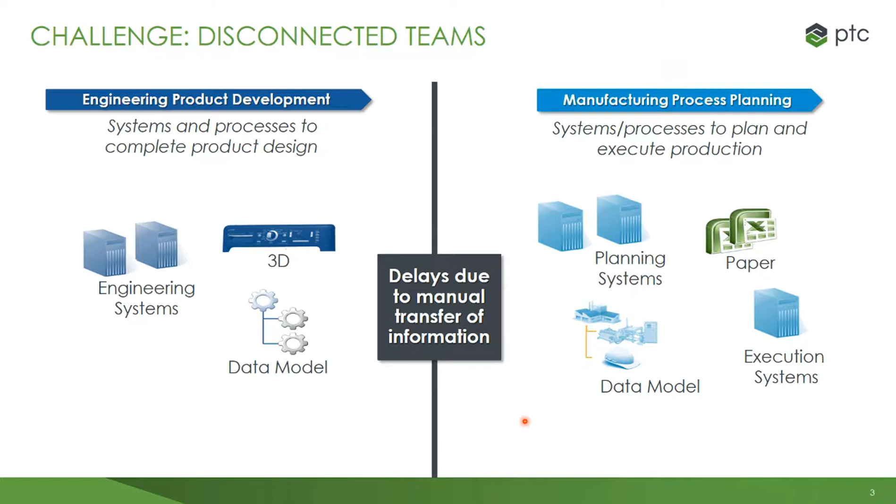Inconsistent data management results when each area of the business focuses on managing only a portion of the entire product definition. It is common for product design to be totally focused on the development of the product. To do this, they concentrate on the design intent and define the product details based on how they do their work. Product development often organizes their data by the type of design data and groups of design features.

It is also common for manufacturing planning to be focused on defining how the product will be produced. They concentrate on the manufacturing strategy and define the manufacturing plan based on utilizing production methods aligned to a facility's capabilities and the factory floor layout. In some cases, manufacturing engineering needs to consider variables resulting from multiple factory locations and strategies.

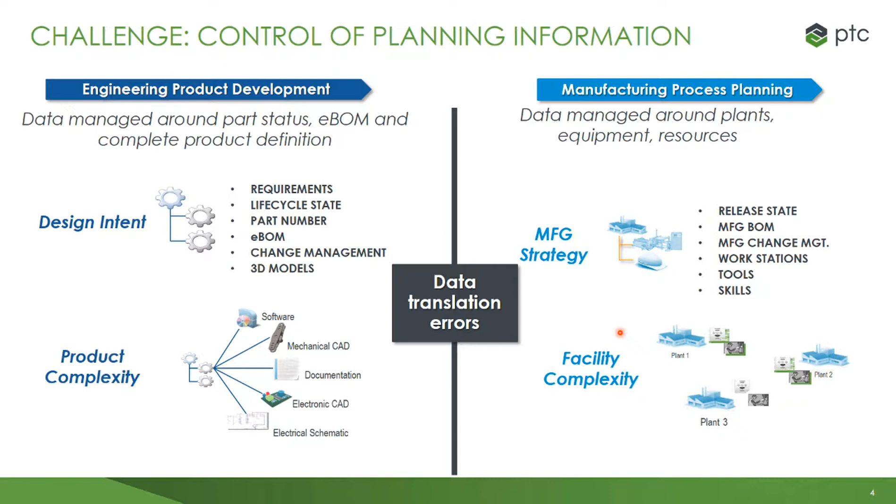Each group's focus on their own deliverables and data, combined with a patchwork of data transfer methods, often results in data translation errors and leads to delays in dealing with design updates and changes prior to the product's start of production. During development, the engineering product development teams will typically perform product design reviews to improve and enhance the product. Manufacturing engineering uses design for manufacturability reviews to identify potential manufacturability issues before production begins.

If manufacturing engineering is not involved early in the design process, they will not be aware of key manufacturability issues, and it may be too late to modify the design to eliminate those issues, or the last-minute change requests from manufacturing engineering needed to support the factory requirements can impact the product's start of production date. These separate processes are usually the result of different goals, objectives, and deliverables for each group. These differences limit the organization's effectiveness and lead to missed opportunities.

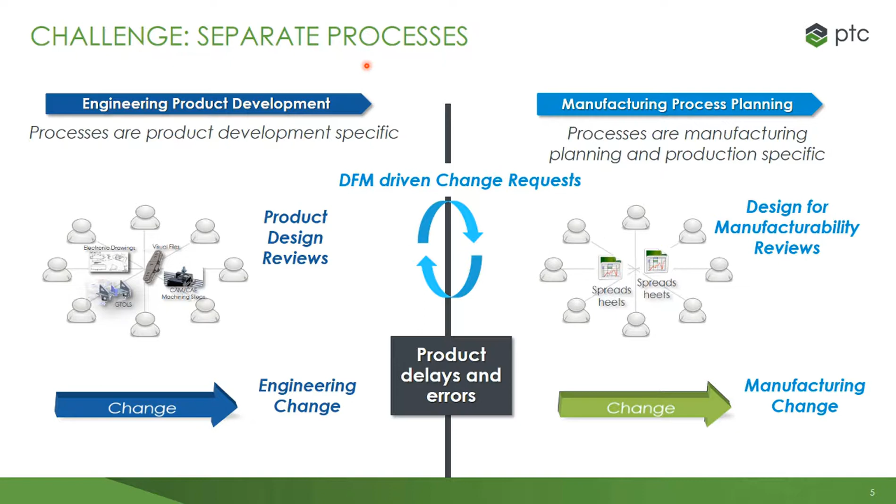When we look at the manufacturing engineering teams, we see that they have the responsibility to plan production for a single product that could be produced in multiple plants with varying resources, machines, and worker skills. When the companies do not have standard manufacturing processes that include detailed information about a specific factory's capabilities, the manufacturing engineer's job becomes very challenging.

Most companies do not have a way to manage a central library of plants, workstations, worker skills, and tools. If manufacturing engineers could leverage existing knowledge, they would be able to reduce the effort to develop manufacturing process plans for multiple plants. The missing management of factory capabilities and manufacturing processes limits the business's flexibility to decide where a product should be manufactured.

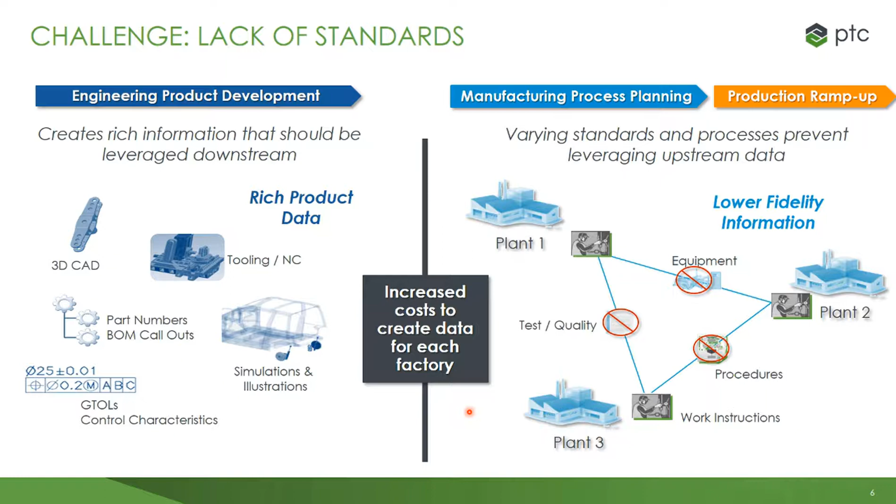The business costs resulting from these challenges are significant. Delays in the transfer of design information to the plants, data quality issues, late changes to the design, all have a direct impact on the product development costs, the quality at start of production, and missed launch dates.

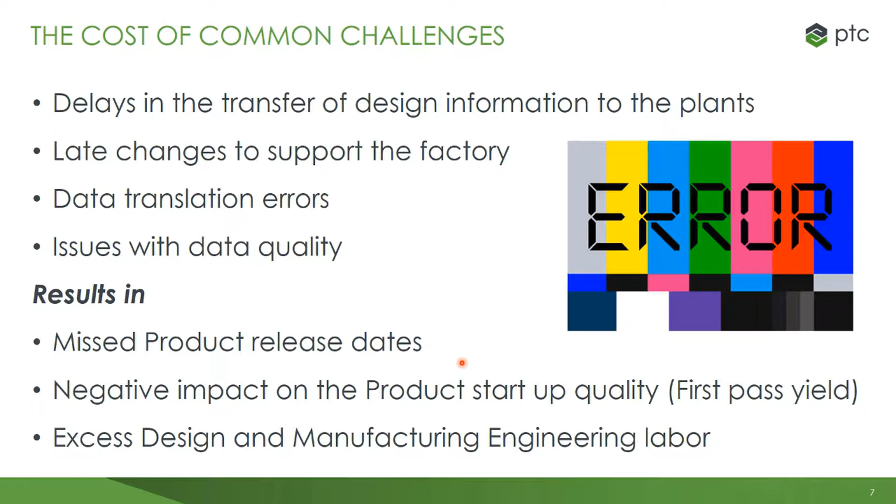For the remainder of this session, we will focus on a fundamental process that will enable your product delivery processes. This fundamental process is the transformation of a product's EBOM into an MBOM. The resulting MBOM is required to support all of the manufacturing planning activities and deliverables. Using the right tools and methods to create this critical set of information will give your business a competitive advantage.

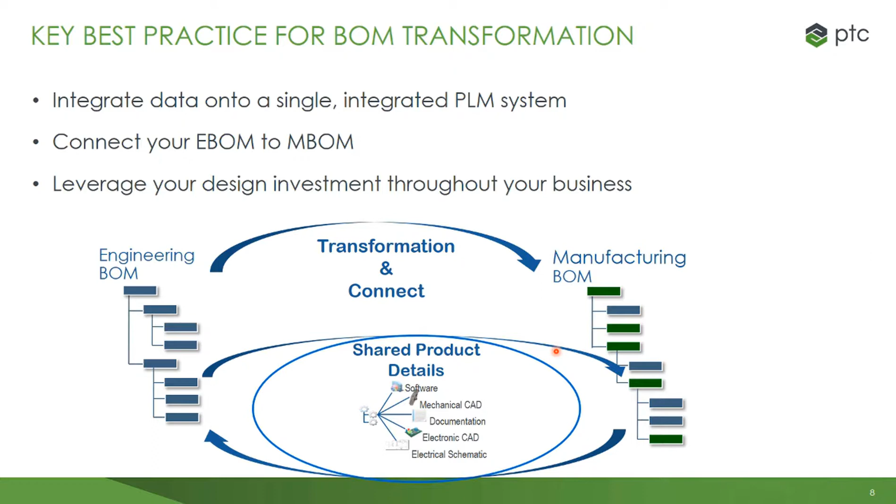In the upcoming demonstration, you will see how completing the EBOM to MBOM transformation process within an integrated PLM enables the entire product development team to leverage the 3D models, EBOMs, MBOMs, and product specifications throughout all aspects of the business. Two key aspects of the PTC toolset that will be highlighted in the upcoming demonstration are: 1. The ability to quickly create a restructured and enhanced bill of material from an upstream source, and 2. The capability to create links between the BOM components in different types of bills of material.

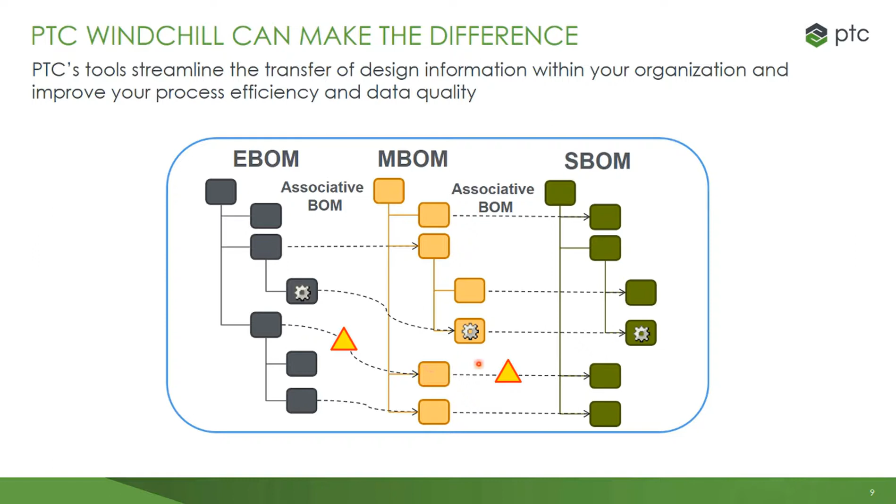The restructuring of BOMs allows the business to accurately align the organization of an MBOM's components to match the requirements of an ERP system. Structuring of a service BOM will support a company's aftermarket business processes. The component-to-component links explicitly capture the details of the source and destination of the BOM components between bills of material. This linking also allows the system to indicate how changes to design will impact specific components in a downstream BOM.

Let's get started with the demonstration. This demonstration will show how the PTC MPM Link BOM Transformation tool can support the early engagement by manufacturing in the product design process. Traditionally, the design process has included the major activities of concept development, system design, detail design, followed by the development of the MBOM and manufacturing plan to support the production ramp-up and full-scale production.

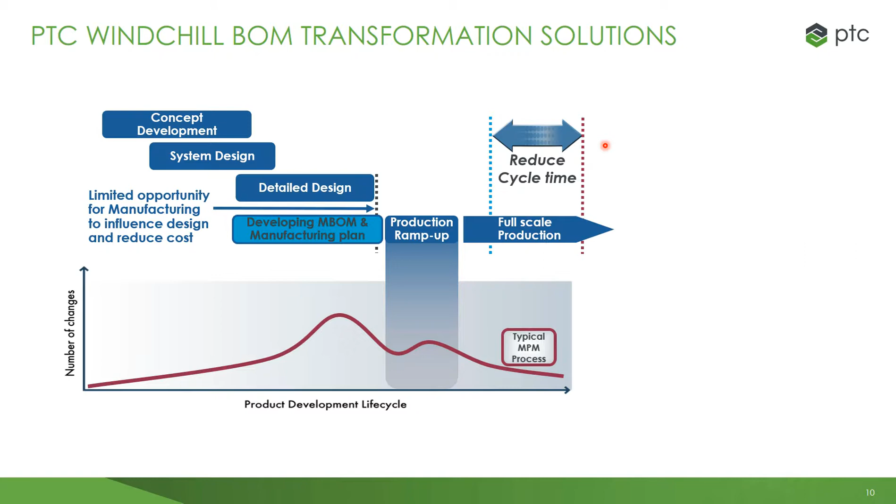This serialized approach limits the opportunity for manufacturing to influence the design and reduce costs of the product before the design has solidified. Using the MPM Link tool can provide your team an opportunity to overlap the development of the design, the MBOM, and the manufacturing plan. The coordinated design and manufacturing planning activities will lead to a reduction in time-to-market cycle time for your product. It will also shorten the timeline and provides for the collaboration within the product design teams to reduce the cost of changes during the design process, as well as a reduction in the final manufacturing cost.

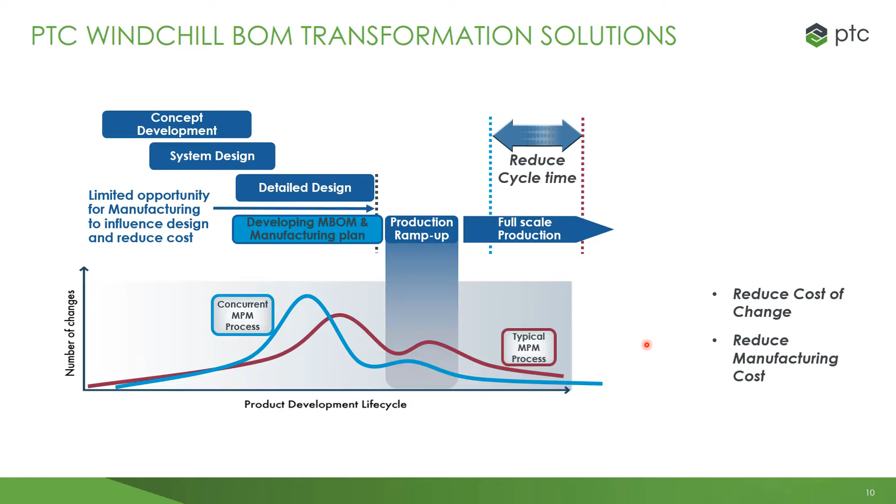For our demonstration today, we will be using a battery box that is part of an off-road vehicle. Using EBOM visualization, we look at the design by turning off and on the visibility of specific parts to allow for a detailed design review. Changing the part structure view options results in the display of the CAD model details for each of the EBOM components.

Continuing a design review, the Part Structure to CAD Structure Compare tool is selected. Confirming the comparison set, the system displays the Windchill Part BOM and CAD BOM in side-by-side panels. Selecting a BOM component on the right side highlights the corresponding component on the left side.

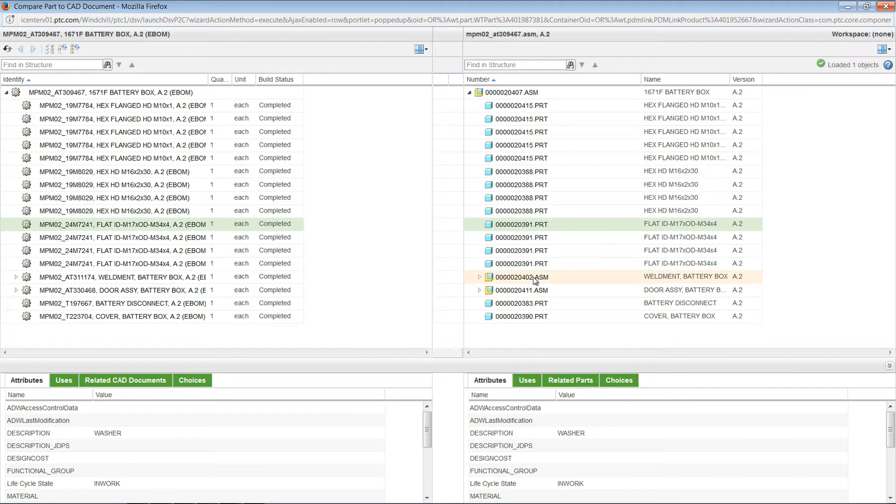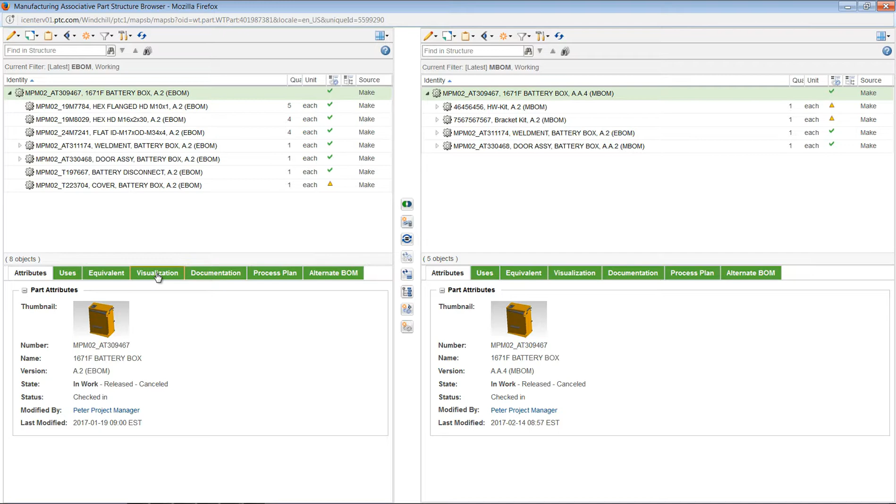Now we begin the EBOM to MBOM transformation by opening the Design EBOM in the Manufacturing Associative Part Structure browser. The EBOM is displayed in the left panel, and the right panel is displaying a partially transformed MBOM. Notice that the 3D visualization provides a good way to understand both the CAD structure and the shape and interfaces between the components in the assembly.

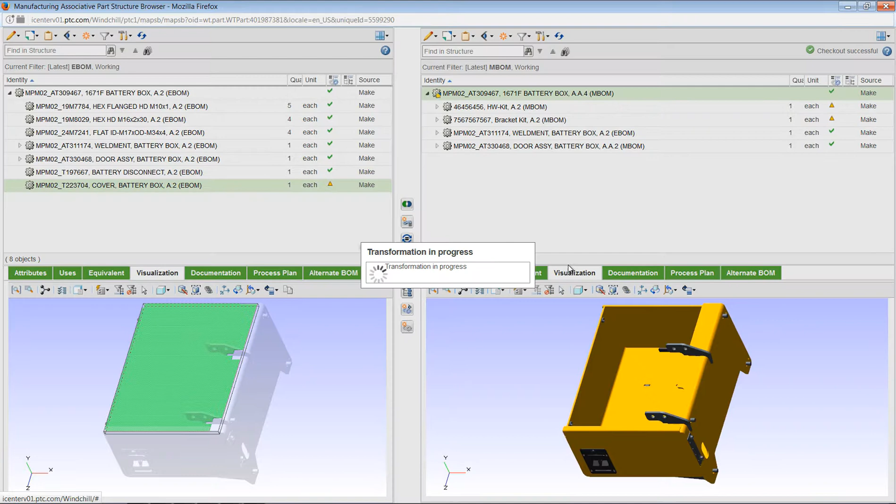For the next step in the BOM transformation, the visualization indicates that the cover has not been placed in the MBOM. Since our manufacturing strategy is to purchase this from an external source, we will use the copy-paste action to create a unique manufacturing part number in the MBOM. The Paste as New Part dialog defines a new part number by adding a suffix to the engineering part number, but other numbers can be used to match your ERP requirements.

Once the new manufacturing part is displayed in the MBOM, we will need to edit its source attribute to indicate this is a purchased part. Using the action menu on the cover part, the Edit Part dialog panel is opened. We proceed by picking the Buy option for the source attribute. This is followed by a check-in action to record this change in the PDM Link database.

A quick visual comparison of the BOMs shows that the MBOM has source defined as buy, and the equivalent EBOM cover part has source defined as make. Checking the design view, we can clearly see that there are two fasteners that have not been placed in the MBOM. Selecting these items directly, followed by a copy-paste action, adds these items to the MBOM.

At this point, a review of the design view confirms that all components have been placed in the MBOM. The MBOM is now checked in to the database as complete. Prior to the demonstration, an initial EBOM to MBOM transformation resulted in the placement of 5 fasteners into a kit and a subassembly in the MBOM.

To review the distribution of these items, we select the EBOM component and then request the Select Equivalent Parts on Other Side action. This expands the MBOM structure to show where the individual fastener components are used in the MBOM. These items can be visualized by using the Show Selected option in the MBOM visualization panel.

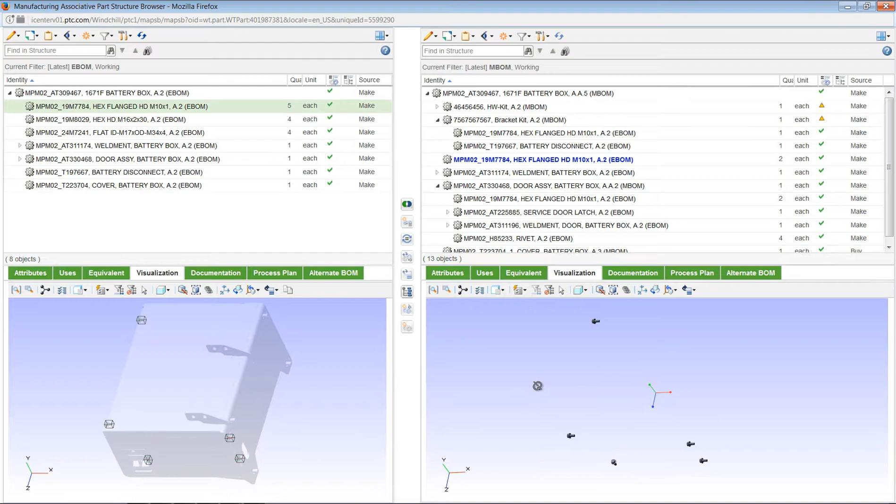A critical aspect of a robust design process relies on the ability for all team members to see the progress of the design and manufacturing engineering teams. Using PDM Link to display the battery box design allows everyone on the product delivery team to see the current elements of the EBOM design view.

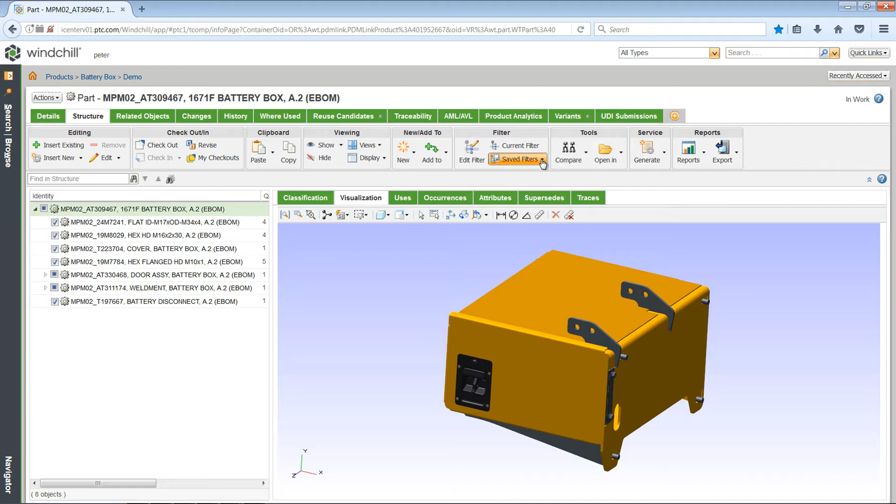Setting the filter to MBOM allows team members across the organization to review the results of the EBOM to MBOM transformation. The displayed MBOM structure detail provides insight into the manufacturing strategy. Using visualization, the external and internal components are clearly visible.

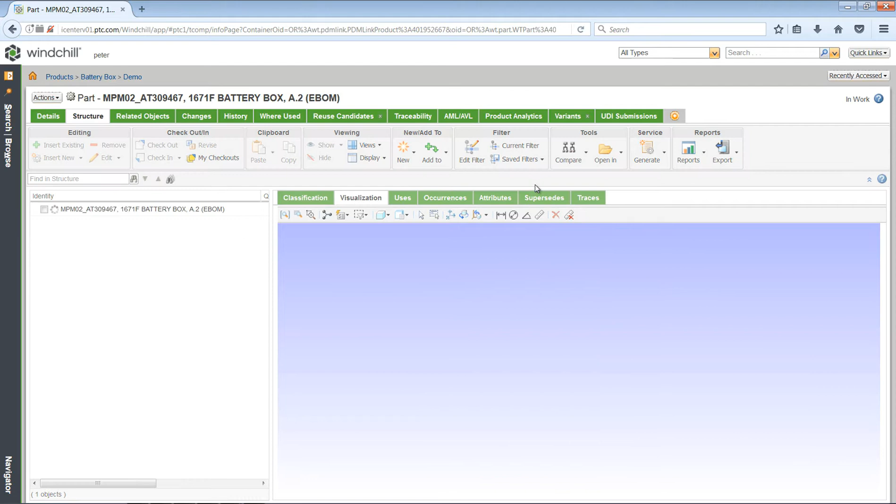During a design review, it was decided that a label was needed on the face of the battery box door. Using Creo Parametric, the engineer adds a new part to the Creo assembly that defines the label. Following a Creo check-in, PDMLink automatically updates both the CAD assembly structure and the PDMLink BOM.

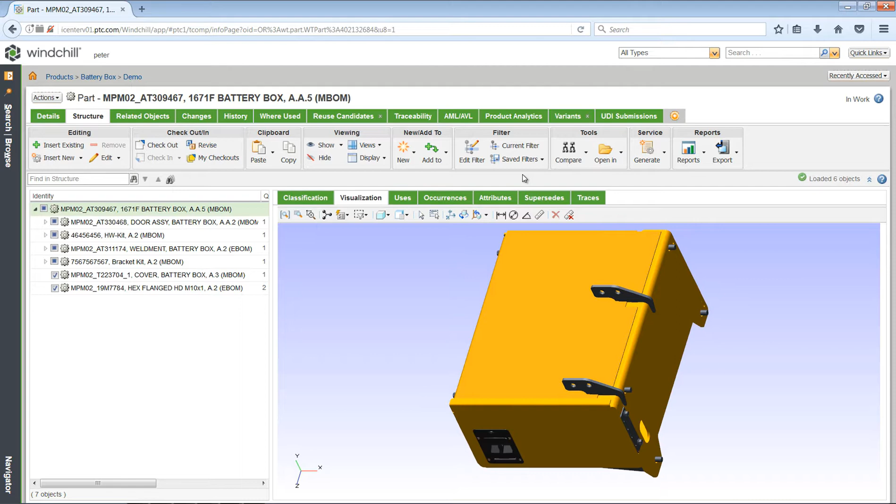Refreshing the EBOM visualization for the design immediately reflects the results of the design changes. Note that the MBOM visualization of the battery box is reflecting the earlier design configuration. The Manufacturing Associative Part Structure browser is open to update the previously transformed MBOM to reflect the new door label.

Refreshing first the EBOM and followed by the MBOM results in the maps displaying both the current BOM structures and the corresponding visualizations. Note that the top assembly MBOM part is displaying a clock icon indicating that it is out of date in relation to the EBOM equivalent part.

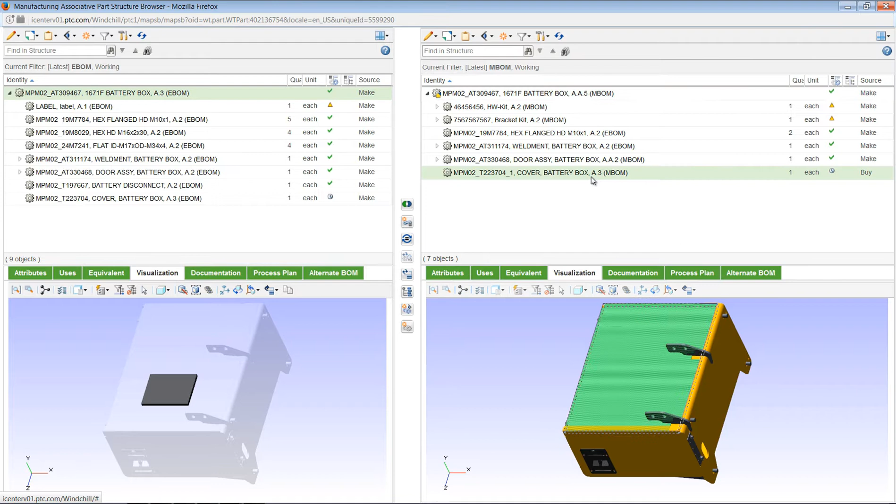Starting with the top part, the Update to Current Upstream Equivalent Object action is applied. This reestablishes an updated equivalence link between the parts. The MBOM cover part is also displaying a clock icon indicating that it is out of date in relation to the EBOM part. The same Update to Current Upstream Equivalent Object action is applied.

Refreshing the MBOM visualization shows the new door with a location for adding the design view label. Rather than manually searching for the label part in the EBOM, the Reconciliation Assistance feature is selected. The tool identifies that the EBOM label part is missing from the MBOM and is highlighted in both upstream panels.

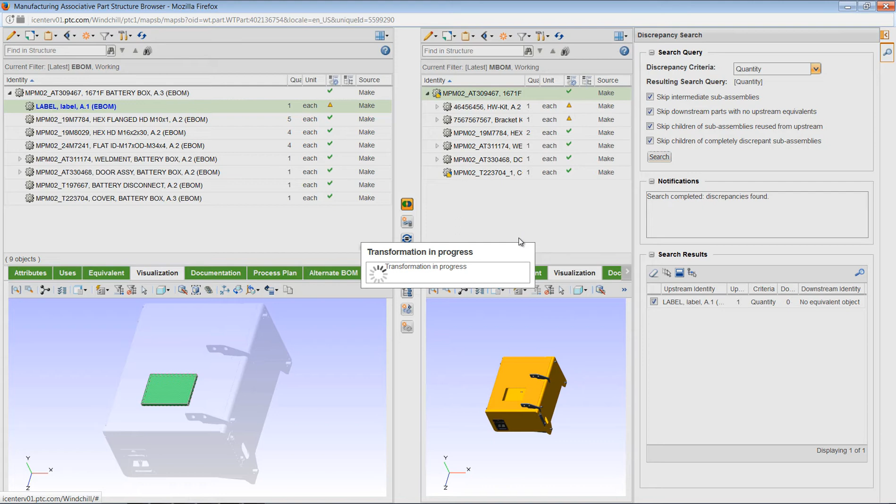Using a copy-paste action, the label part is added to the MBOM, and the visualization panels for both BOMs are updated to reflect the action that was taken. Re-executing the discrepancy search returns an empty list indicating that all of the EBOM components are included in the MBOM.

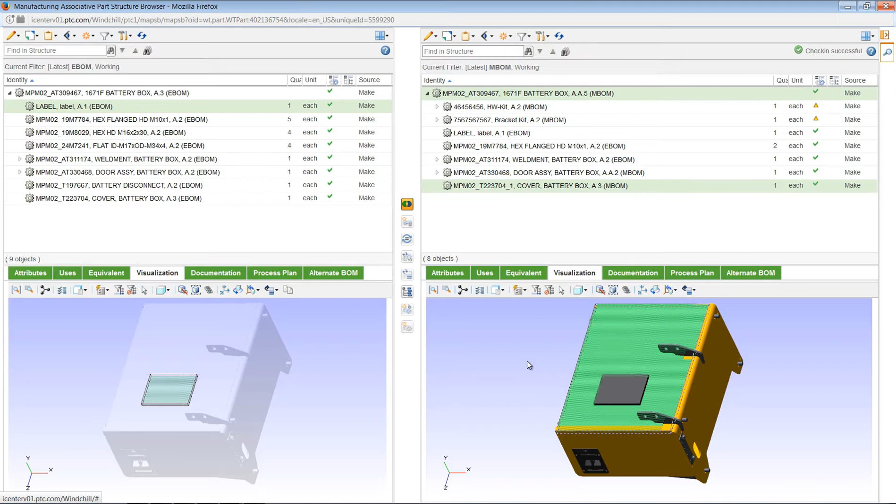As the final step in the EBOM to MBOM transformation process, all updates to the transformed MBOM are checked into the PDMLink database. Utilizing the MBOM view on the PDMLink part details page, we can see that the updated MBOM is now available for sharing to the entire product team.

The focus of this demonstration was to highlight the value for your product development teams to be able to simultaneously complete the design and manufacturing engineering activities in advance of a production ramp-up. This will shorten your product's time to market and reduce the cost of change and the cost of manufacturing.

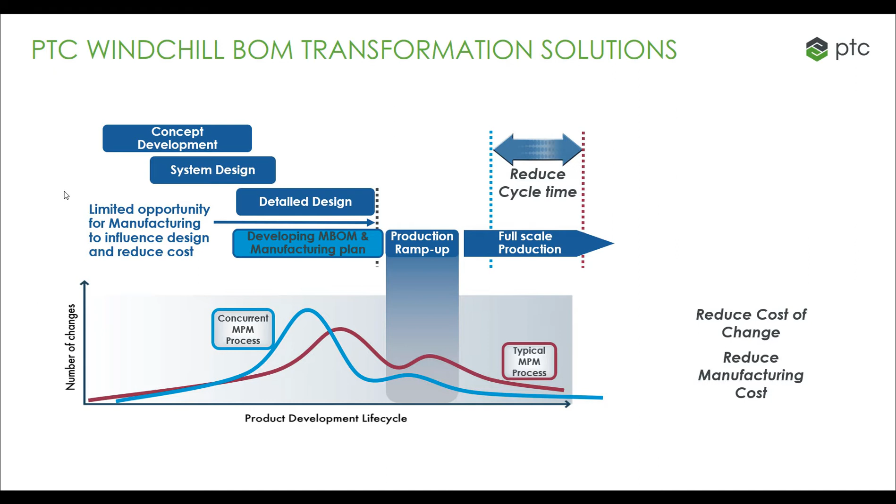Now let's do a review of what you have seen during this demonstration. We started by completing the EBOM to MBOM transformation for an initial design. We then highlighted the capability to share the manufacturing and design engineering results to the entire product development team as MBOMs and EBOMs with 3D visualization.

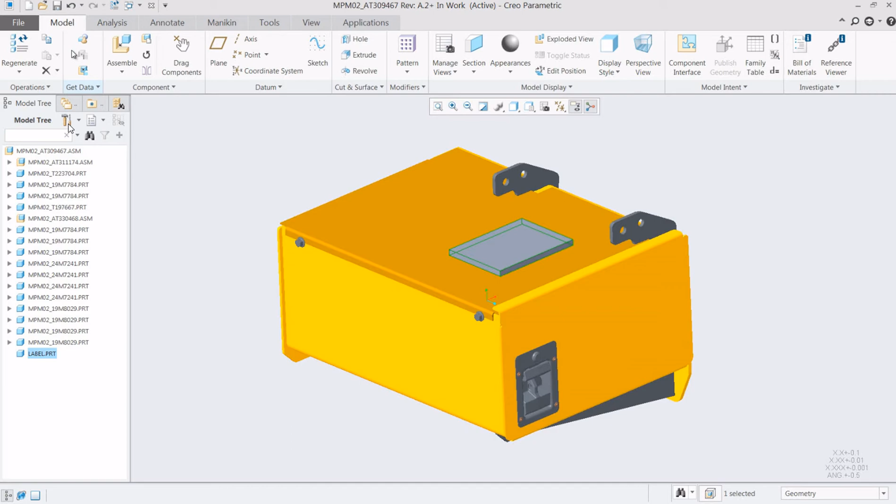We showed how a design review triggered a change to the original design that resulted in a label being added to the battery box cover. The final steps of the demonstration included an incremental update to the initial transformed MBOM using the Manufacturing Associative Part Structure Browser. Thank you for your attention during this demonstration.